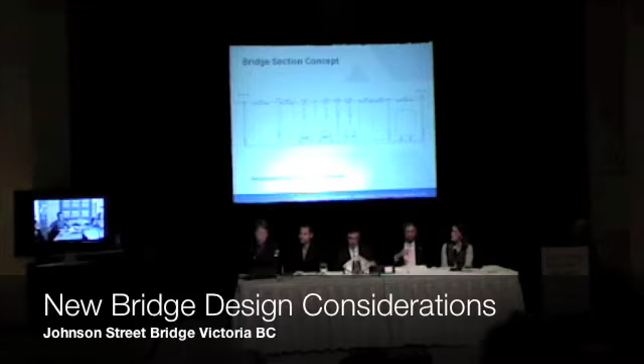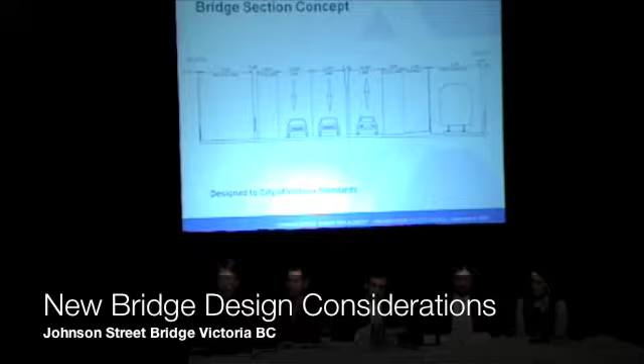We've looked at two cross sections for the bridge, and here it's shown in a fairly schematic manner. You'll notice that on the north we've got a 5-meter wide multi-use trail. You'll notice also that on the roadway we've got 1.8 meter wide cyclist lanes. And then in addition to that we've got a sidewalk that is located between the roadway and the train corridor. The sidewalk is 2.5 meters wide. This was the bridge cross section that we started with.

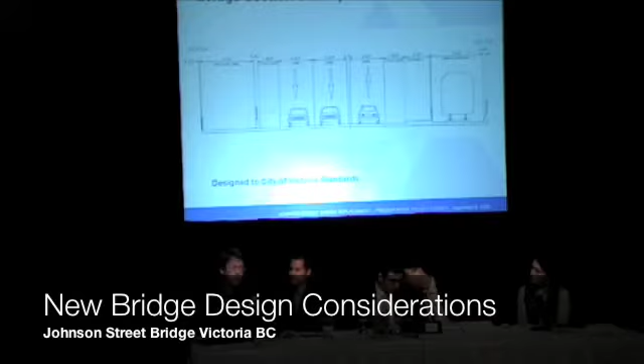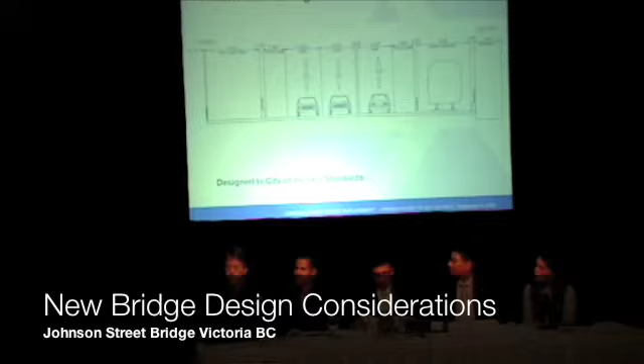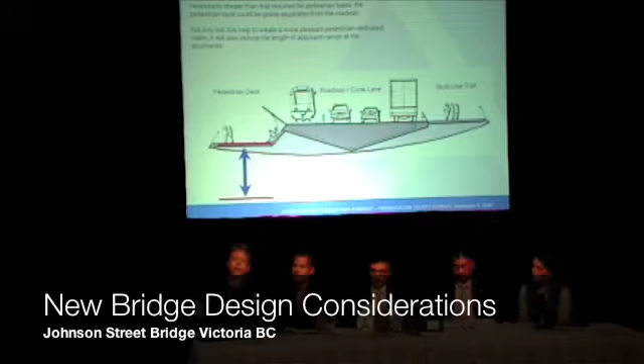And then in discussion with the Citizens Advisory Committee, we had a look at this alternate bridge cross-section, which is essentially the same as the previous one, with a very small tweak, which is moving the sidewalk off from in between and moving it south, so people walk with the view of the inner harbor. The sidewalk could be located at a lower elevation than the rest of the bridge. And that really is there to provide a sense of separation between people who are walking and cars that are driving on. This gives you an idea.

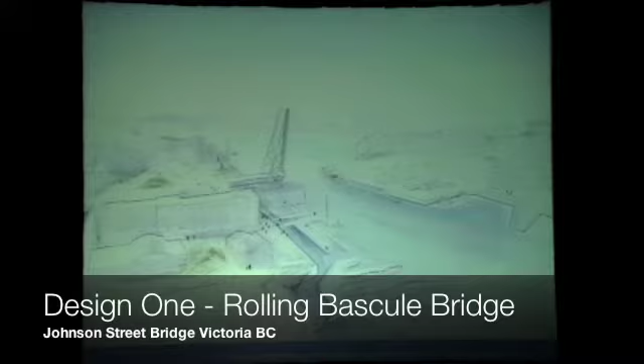So the interesting thing about this structure is it's a very efficient structure. It's basically a set of 2 lateral beams which will work structurally in a very simple manner and support the main deck from it. A big weight on the south side, which will go underneath the bridge and will be protected by the subdeck, the part of the deck what we call the backspan, the fixed part of the deck on the downtown side, which will be steel.

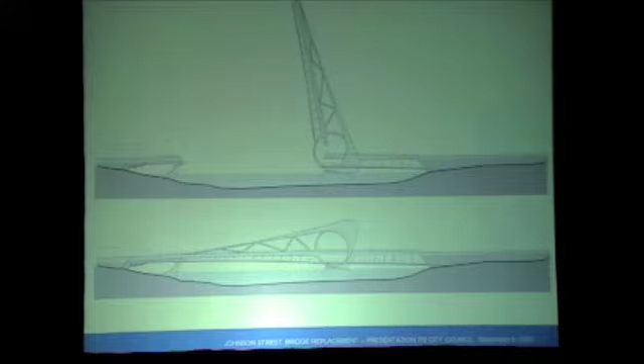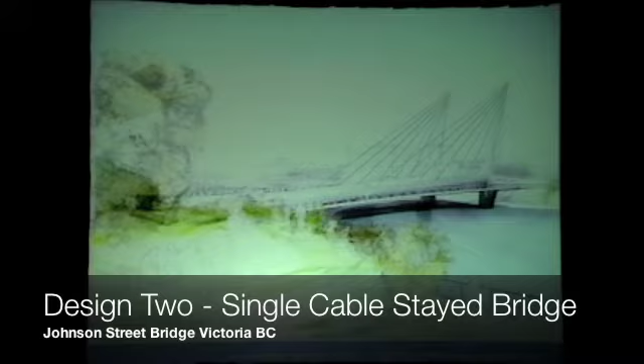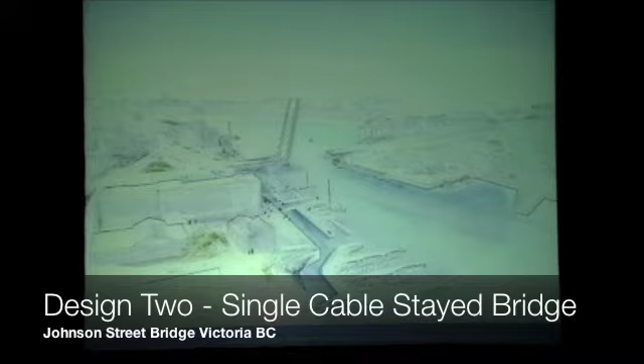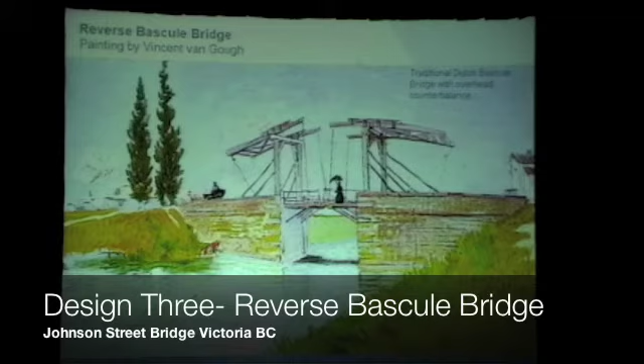So in there, it's effectively the same principle of a high-level counterweight system, which, if you go to the next slide, basically slides down and takes into tension the deck and brings it back up. So it's very... to the next slide. It is this principle, so just showing basically the counterweight. The idea is the counterweight goes down, and when it goes down, the deck goes up. So it's a folding system, effectively.

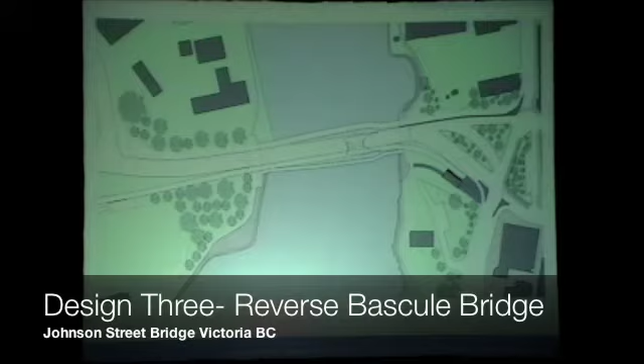And in plan, very similar to the other bridge, you will have a counterweight at high level, and the taper. The new bridge would be located north of the existing bridge, and it would have a multi-use trail on the north side of that bridge. In discussions with the Citizens Advisory Committee, it was felt that looking at the so-called alternative cross-section was very worthwhile in terms of taking the sidewalk out from between the railway and the roadway and moving it south of the bridge to give you a great view of the inner harbour as you strolled along.

Also, elements of the design that we've not worked out as yet, but are an integral part of the whole bridge concept. We have been embarking on what is frankly the most comprehensive consultation program the City of Victoria has ever undertaken. We expect there will be much community interest in these designs, and we would like to provide a variety and a number of opportunities for the public to provide feedback to Council preceding the decision to be made on the 24th of September.

That's in terms of a broad awareness strategy through radio, print, online advertising, earned media, to raise awareness of the fact this decision is pending and that these 3 designs are available to the public for commentary, for input, and that all of that information will be presented to Council prior to their making a decision on the 24th.

On September 23rd, Council will receive what I expect to be a very large package of information, and that will identify all of the places that we have been in the community, all of the interactions we have had with the community, and all of the feedback that we have received. We'll be monitoring this extremely closely, and you will all receive that package the day prior to your decision.